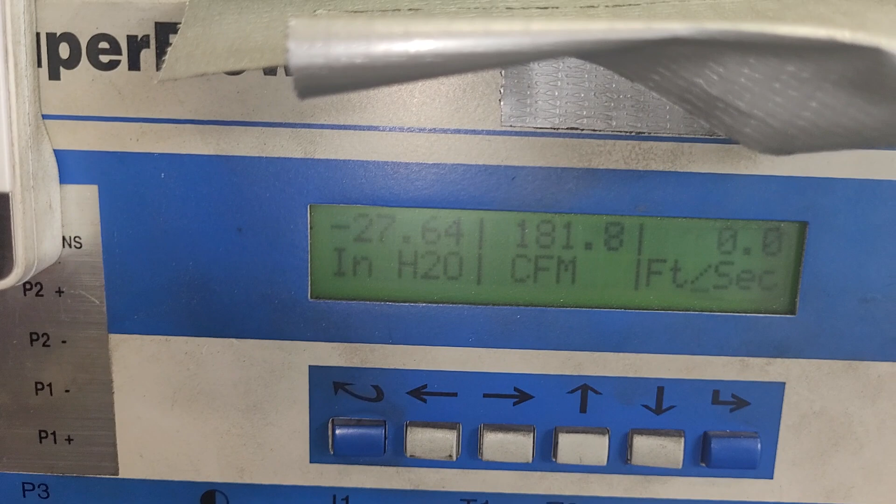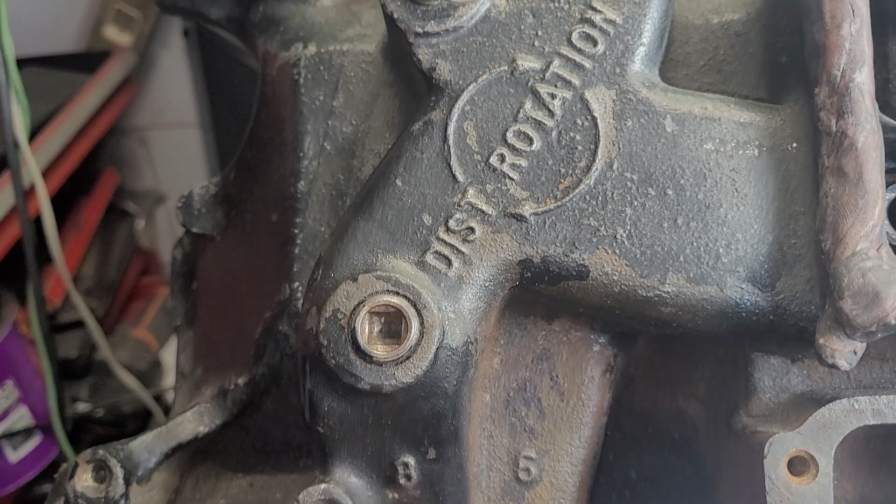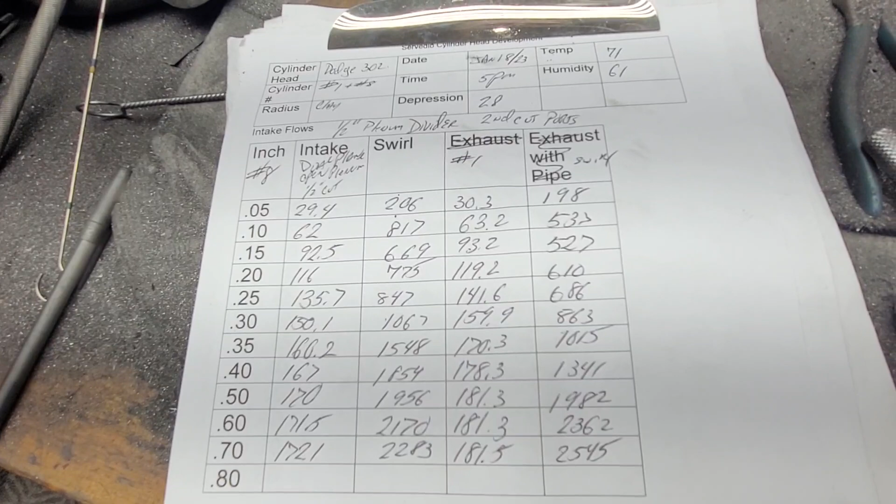Now what you really need to do is compare these to the last two that I showed you going through the quickie port. Everybody loves the quickie port, right? Except me.

I liked the finned port because it sounded better on the bench and it had better air speeds through the port. Well, if you take a look at how we did on this...

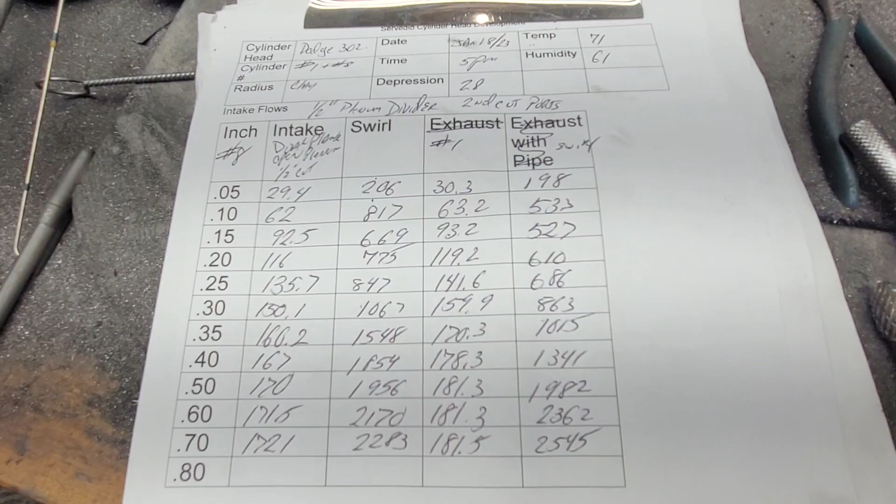This is a little behind, it's an upper plenum. This is number 8. Number 8 has got a fairly sharp corner, right? And I know from doing Chevy intakes that are designed like this, this runner is always hurting. Not really sure why, it looks like it's nice and big and has a nice curve.

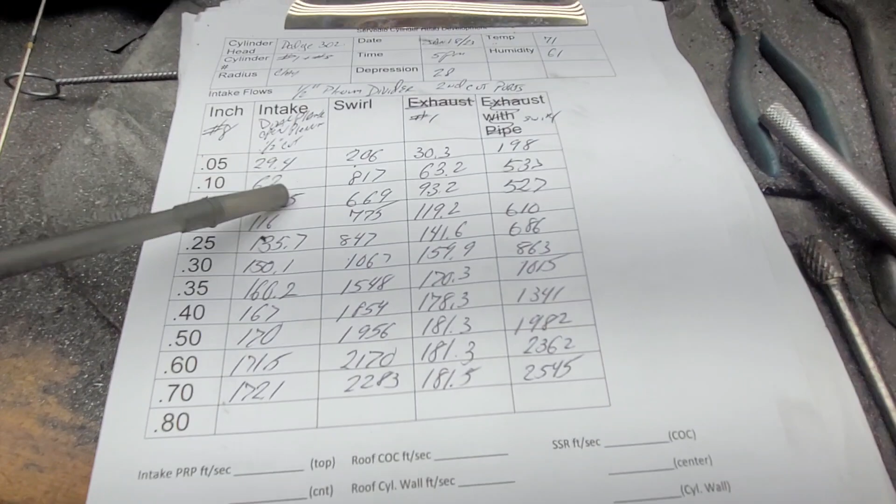It's always low on flow. So yeah, this one's a little short. This is actually the second time I've flowed it, I think I did some work to it. Let me just check - yeah, number 8. Last time I did it was only 166, so I did some more work to it. I got it up to 170 at 500, 165 on that one.

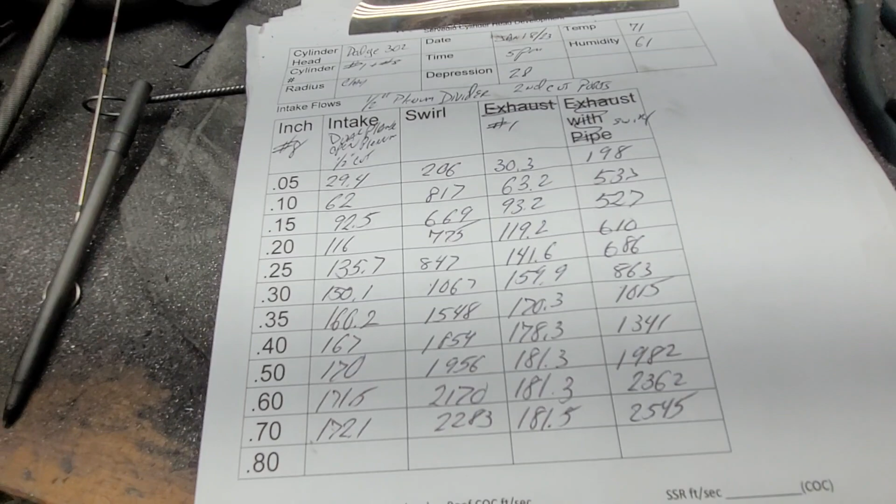Got a nice swirl curve, nothing to complain about. Yeah, it's a little short on CFM. Now that had to cut down plenum as well.

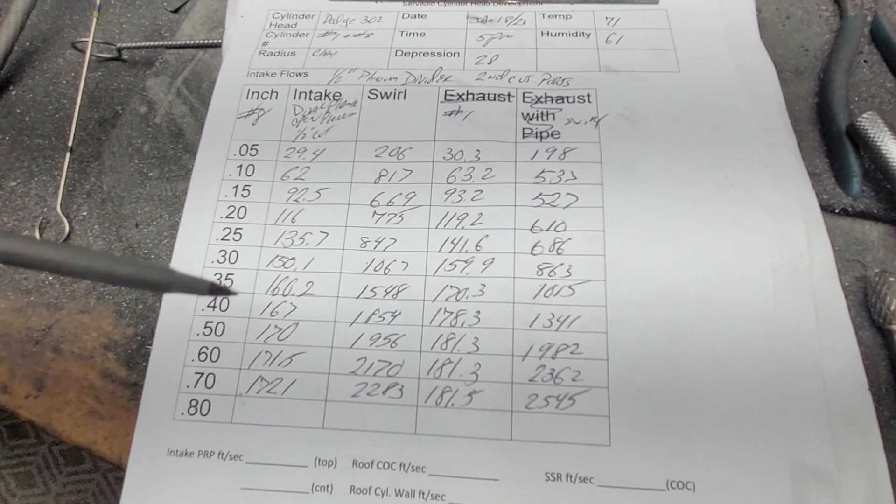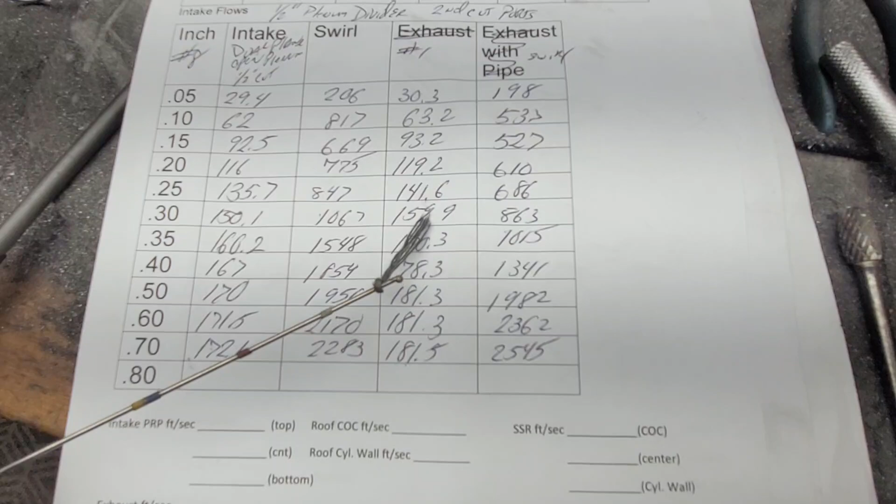Okay, number 1 hangs right with the other ports. Right, it's the deeper plenum. I did the demo with the little stubby flag. See, the little stubby flag shows you different things than the long flag, because with the long flag the end tends to whip around, but the shorter flag tends to just stand straight.

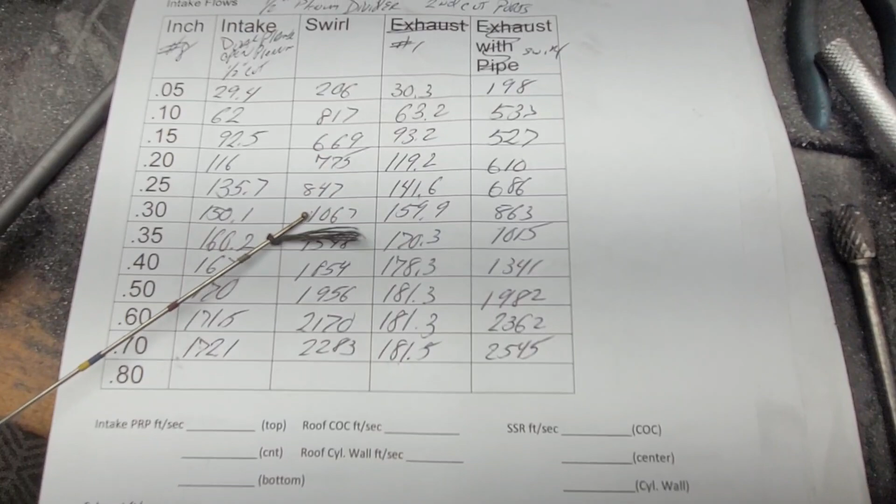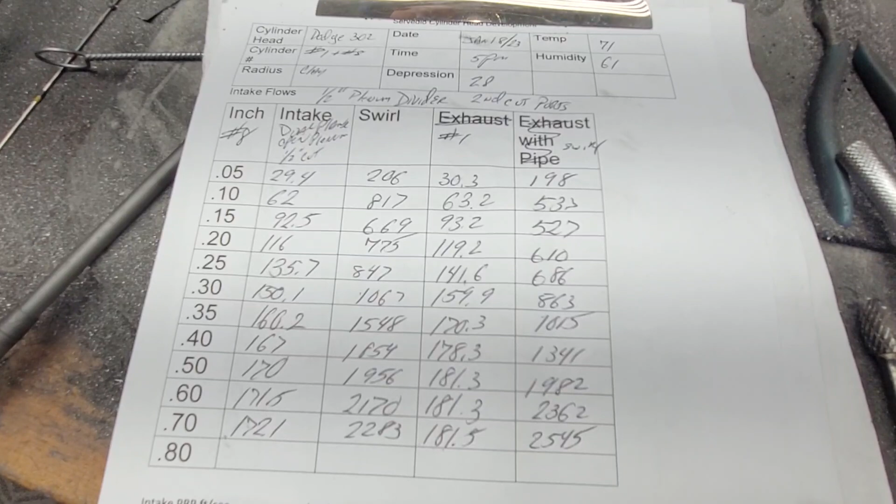It doesn't always wag back and forth. You can see in a couple spots it did, but overall that's pretty good. I am thinking I need to do a video that does the measurements for the spacer that my buddy can make up for me.

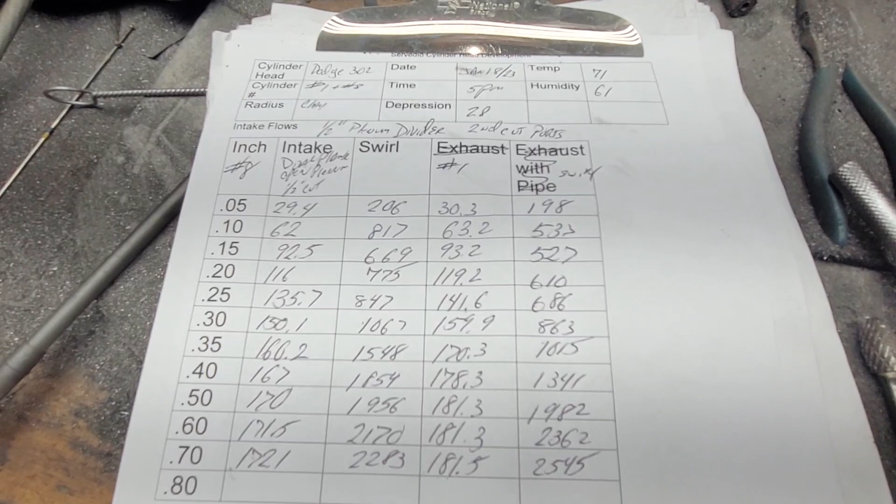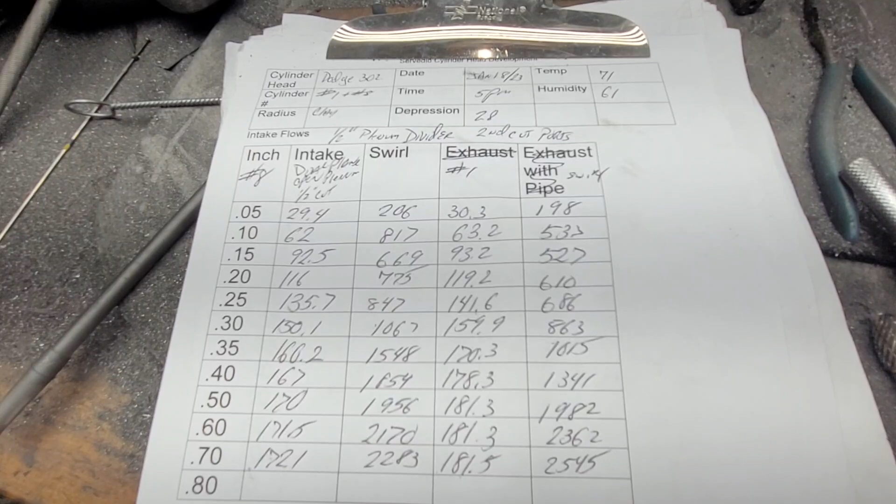I'm thinking about 3.5 inches tall. I'm thinking whatever the original bores were, 1 inch and 5/8 I think they were. The top of the spacer will have that size holes, but I actually want it to get smaller down towards the middle.

I don't know if he can do that. Maybe he just bores two 1.25 inch holes through it and I'll do the rest. I actually want it to neck down in the middle.

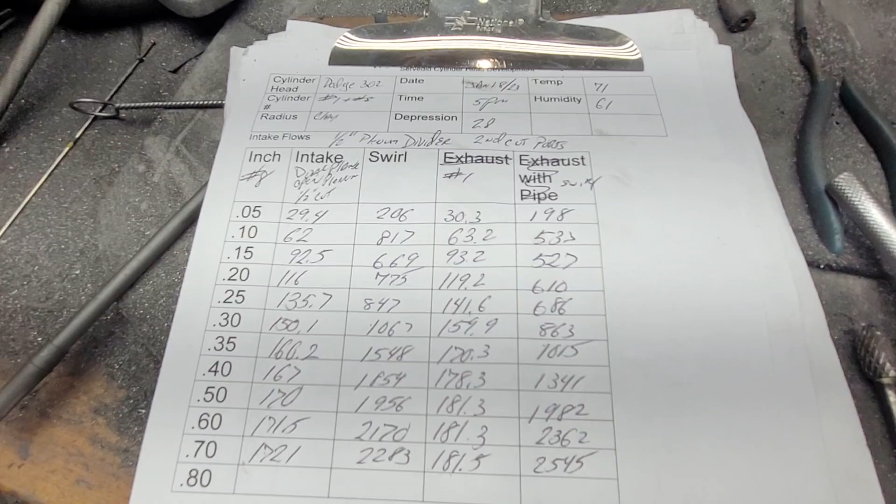You know what, I did a quickie drawing of it at work during lunchtime. Not a great drawing, but it's just an idea rolling around in my head. I'm thinking of doing something like that, where it's actually a Venturi, and then it opens up.

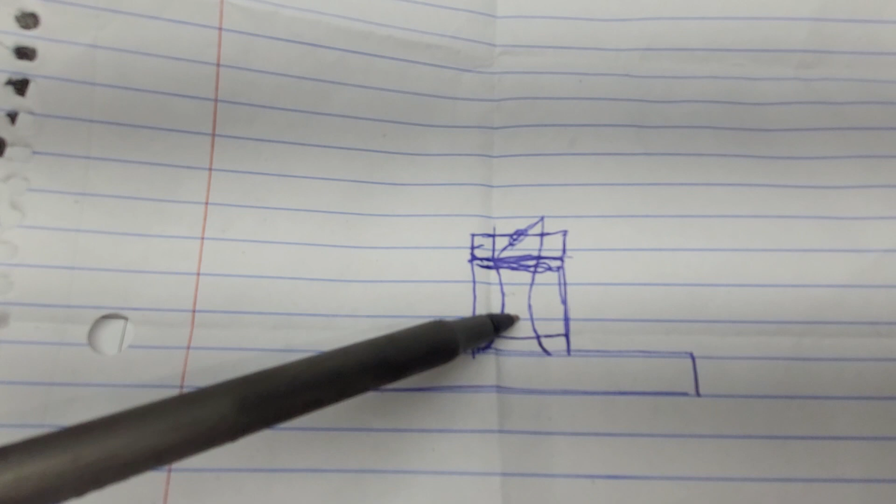Because I'm thinking it'll have a chance to speed up, drop the pressure, right? And then this part of the Venturi we have pressure recovery, right down the sides. It'll be especially beneficial on the upper end.

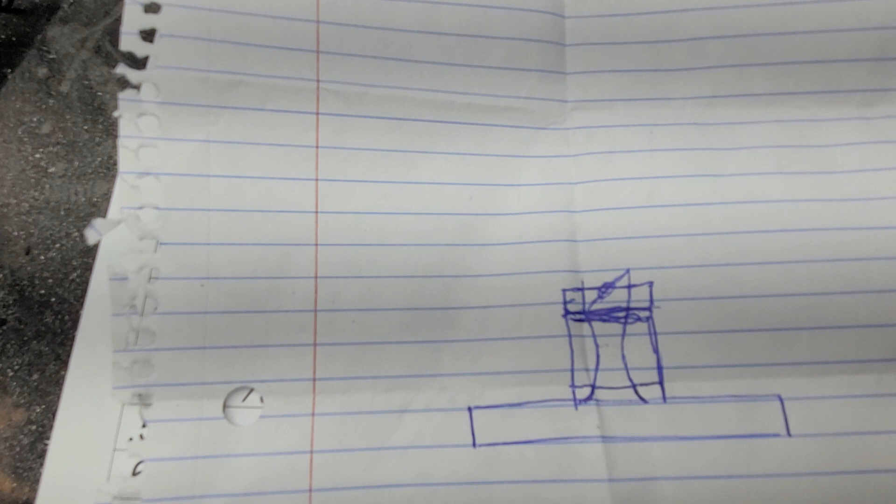You guys give me a little feedback on whether I'm out of my mind. I've never seen a spacer designed like that before in my life. So I really don't want to hear about 'oh Charlie, you copied that from somebody.' I didn't, I thought about it. And in fact, the way I'd like it designed, you know what...

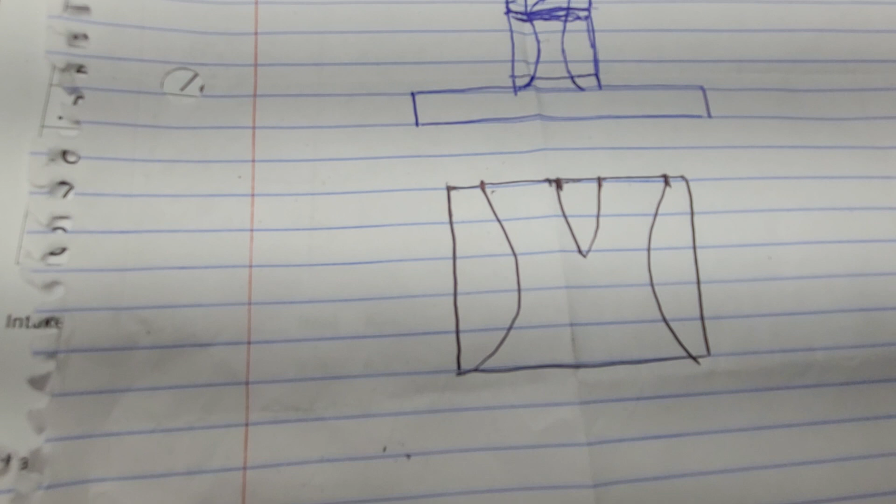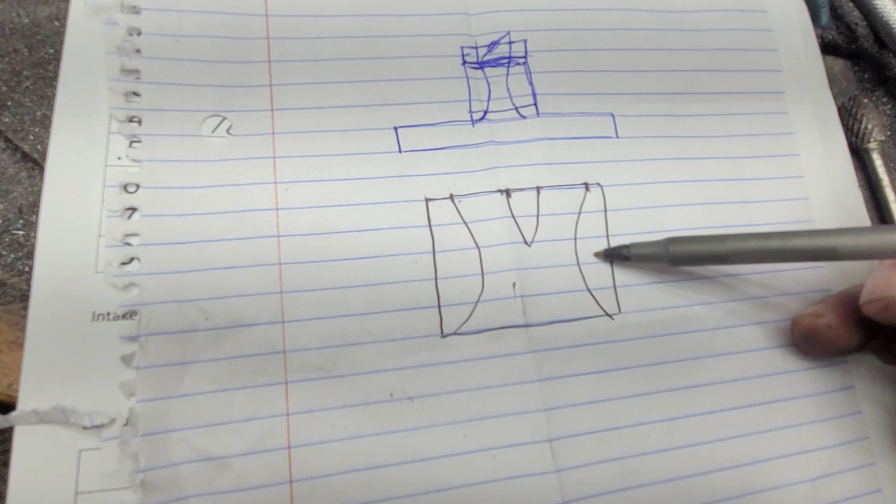I'm going to draw the side view of it. Now this is looking, let's say, from the front of the manifold towards the back of the manifold. I'd like to get something like this. So even if my buddy can just drill 1 inch holes straight through and I can shape everything else out, that wouldn't be a problem. I just got to give him the dimensions of the block and where the bolt holes and so forth go through. This is what I'm thinking of doing.

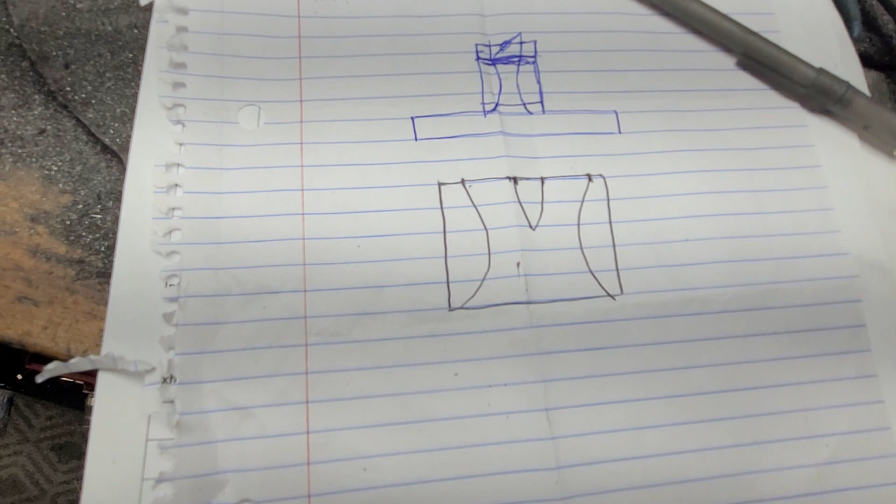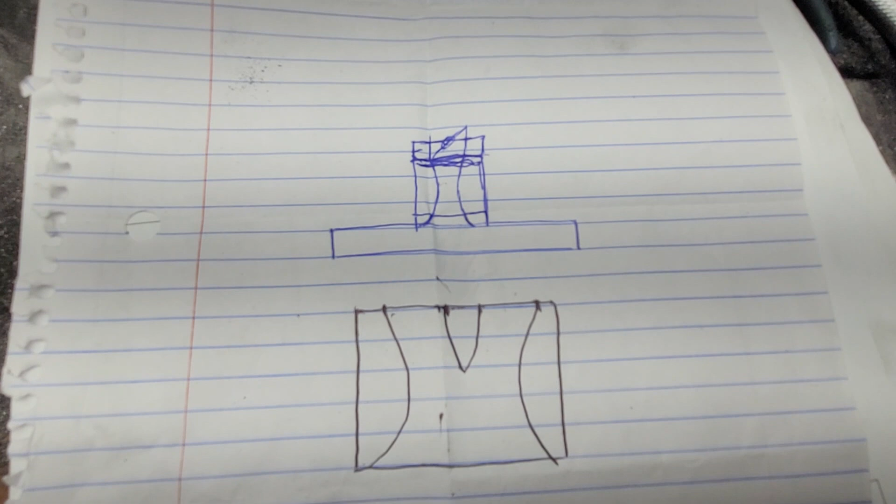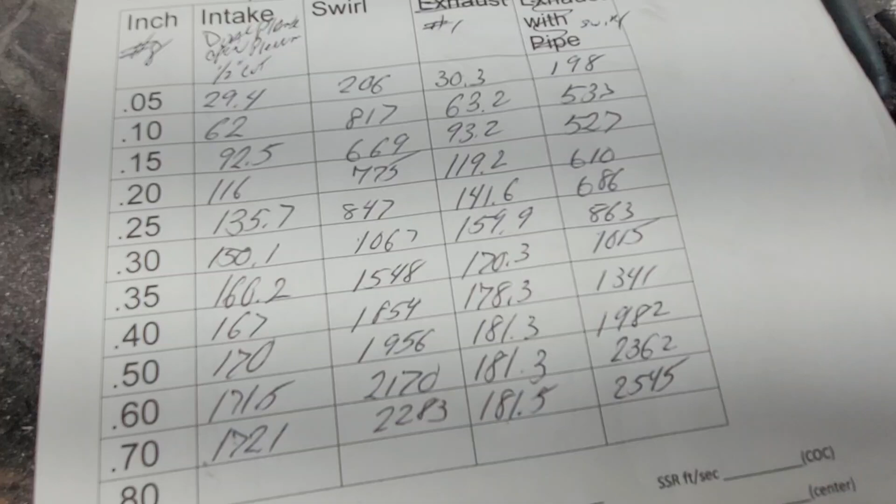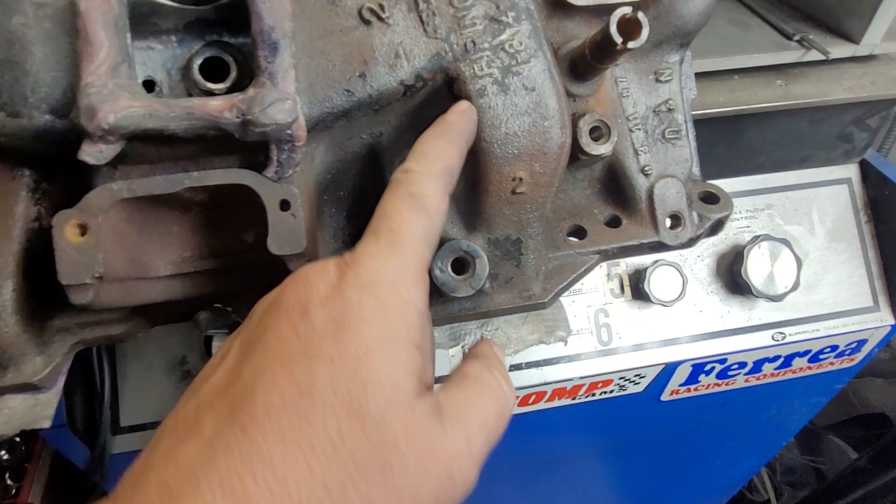And I still have, I haven't even finished the rest of the ports in the head, so I have to finish the other ports in order to do the other 4 runners in that manifold. Quite a few of them have the really sharp turn, right - this has got the really sharp turn, number 2, and number 5 has got the really sharp turn. That makes a difference, so I expect both of these to be lower than what we just got on this one.